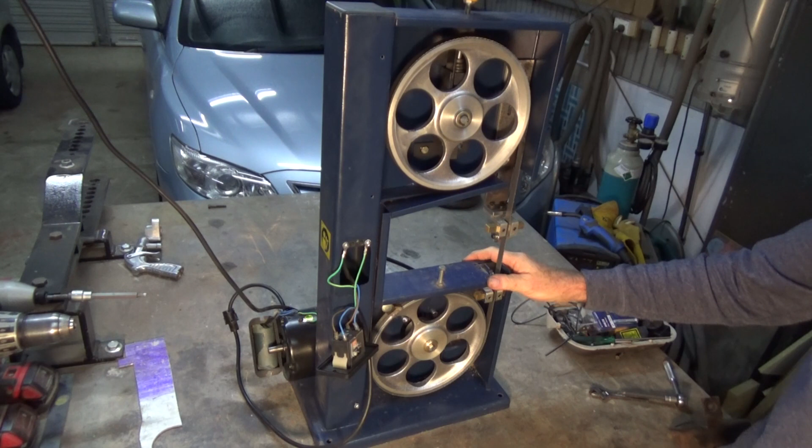In the last episode I left you with the bottom wheel being rotated by the motor, and we had a look at the gearbox assembly and how that was mounted to the back of the saw. We had the top wheel fitted, but at that stage I hadn't shown you the bandsaw tensioned up on the wheels and actually rotating.

Also in the last episode I was using an inappropriate gearbox. I had a 60:1 reduction. What I really wanted was a 30:1, and I've got that now, and I've mounted the wheel permanently onto its shaft. There's a big brass washer there and a draw bolt which keeps the wheel mounted on its keyway and mounted to the extension on the gearbox spindle.

As you can see, I've got the blade fitted, it's tensioned up. I've got the blade guides fitted now. There's still a lot of work to do on those, but it's sort of at the point where I think it's going to go forward. I'm going to run this down and show you what it looks like with the blade tensioned and running on the wheels, and you can judge for yourself whether we're getting anywhere with this project.

So here we go. Electrically safe, as you can see.

Now the first thing you might notice is it's way quieter than when I showed you in the last video. That's because I did a lot of work on the coupling between this extension shaft and the gearbox, and also the motor mounting, which we'll look at shortly.

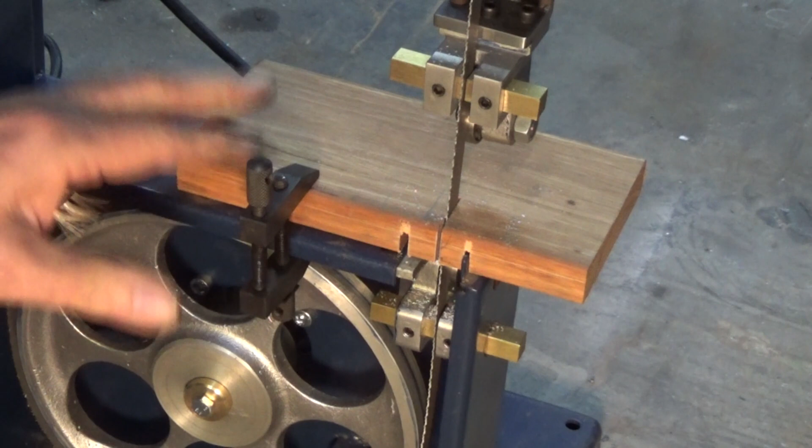Okay, you'll have to forgive this temporary sort of table I've got on here. This bracket still has to be attached to the back of the saw, and the table fits on top of that, and I just haven't got to that stage yet. So I've just got a piece of hardwood clamped down to the top of the frame here, and this would be enough to give you a demonstration.

So this is 3mm thick aluminium. We'll just see how that goes.

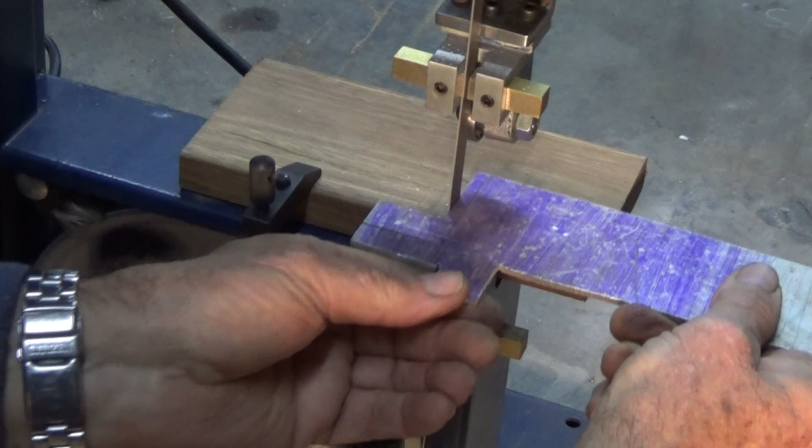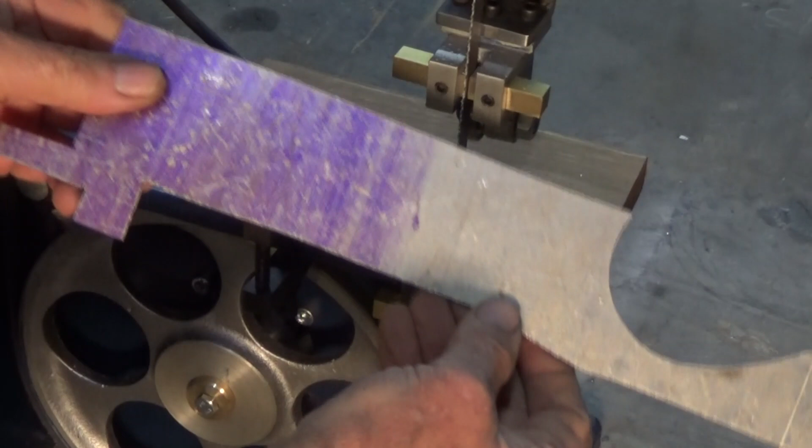So, I'm not sure what the cutting speed there is, but that's as good as I want this to be. This is pretty much what I want it for. It's just for cutting up this sort of stock quickly and simply without having to break out things like a jigsaw and clamps and straight edges and all that sort of stuff. So that's aluminium. I'm happy with that.

Let's try a piece of steel. This is roughly the same thickness in a galvanized steel.

Okay, a bit slower, but it's controllable. I can see what I'm doing. I can guide that cut along a line very easily. I can cut into a drilled hole if I want to take out sort of a U-shaped section out of a piece of stock. I can take a strip off an edge. You know, it's pretty much what I expected this to do.

Now, just trust me on this, it's early days. I've got a lot of work to do yet with this blade guide system to make sure that that's supporting the blade properly. I don't have the blade tensioned up fully at this stage because of the problem I have at the bottom here. But as a proof of concept, I'm feeling like this is going to be as good as I want it to be.

Okay, so let's have a look at how I got to the point where we got these blade guides fitted. I'll show you the manufacturing process for that. And then we're going to look at the motor issue.

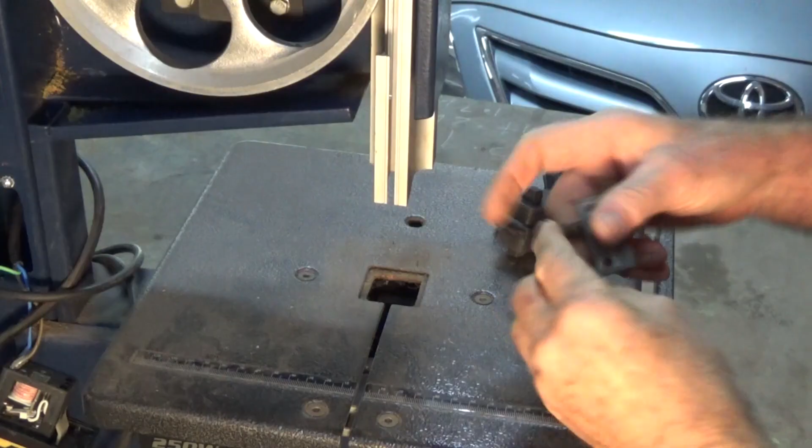This is the only bit left of the blade guide assembly. The one below the table is completely missing. This one just came like that and had a ball bearing mounted on here, and I'm guessing it was designed to fit underneath this aluminium extrusion.

The ball bearing was to take the back thrust from the blade, but there was no evidence of any side-to-side support for the blade, so I'm not sure how that was meant to work. So what I've done is made up some patterns for some new castings. This is the one for the top blade guide assembly. There'll be a ball bearing fitted on here, and these core prints are for a square hole that'll go right through the casting later on.

We're going to fit some brass square side supports that will be adjustable and can be locked in place with a grub screw from the front. I decided to go that way because it's simple, it's robust. I had a saw with that system on it and it seemed to work quite well. So that one will go there.

The bottom one will be screwed in from... how does that work? Yeah, that's going to be screwed in from the rear to the back of the saw frame. So what we need to do is get those castings made, get them machined, and fit them.

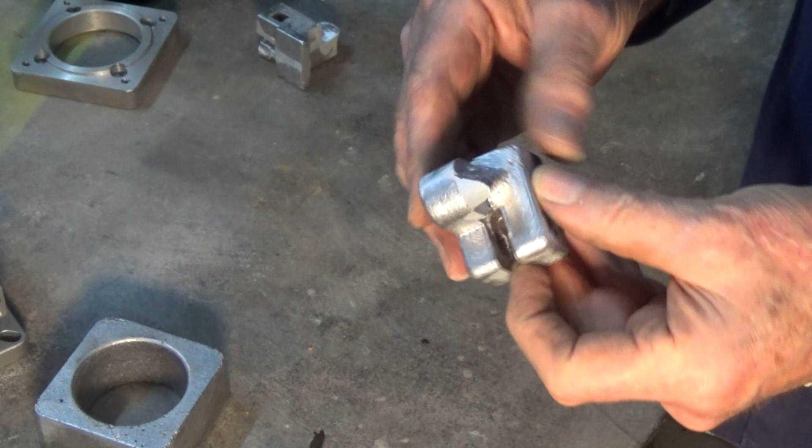Okay, situation report. This casting here turned out good. The core has done its job. It's made the square hole through the casting where the brass blade guides will go, and the other gap here is where the blade will pass through the blade guide on its way down to the bottom of the table. So that's all good.

And this bit here, well, rookie mistake really. I put the runner in the drag side of the mould without referring to the cope side or the top side, and this projection or overhang was there. So the runner ended up being in the way. But it doesn't matter because this is all going to be machined away.

I've got to put an accurate machined surface on this projection here for the bearing. The bearing itself is going to go sort of like that - I'll show you on the other one. So here on the other one you can see the bearing is going to sit on that space there, and it'll be mounted on an eccentric so it can be rotated around to take up the gap between the blade and the bearing outer surface.

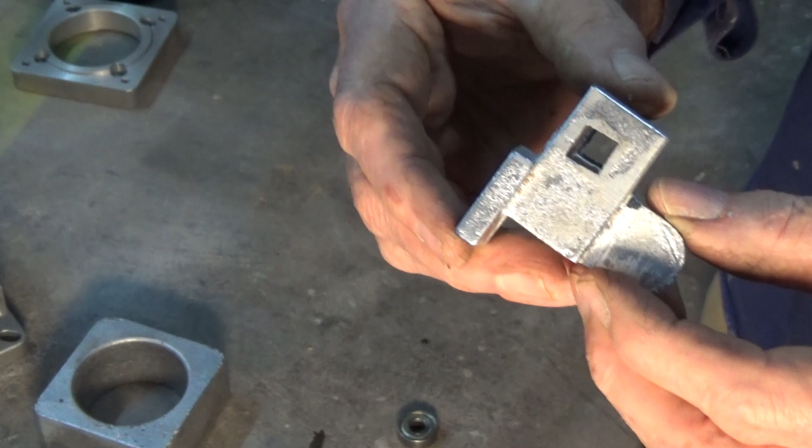Now this one, well, you judge for yourself. It looks like the core got displaced sideways when I closed the mould. That side there you'd say, well, that's okay, that's acceptable. This side here is a bit more ugly, and disappointing, but I think I can make it work.

So I'm going to go ahead and machine this anyway. Okay, this one turned out great, and obviously that's a much easier casting to do, and I'll go ahead and get that machined as well.

Now, I knew that this was going to be problematic, and I just wanted to set myself a bit of a challenge really, to see if it could be done. In hindsight, I sort of knew it was prone to failure because you've got to close the mould on that core, and there's every chance it's going to move a little bit or smash away part of the top of the mould.

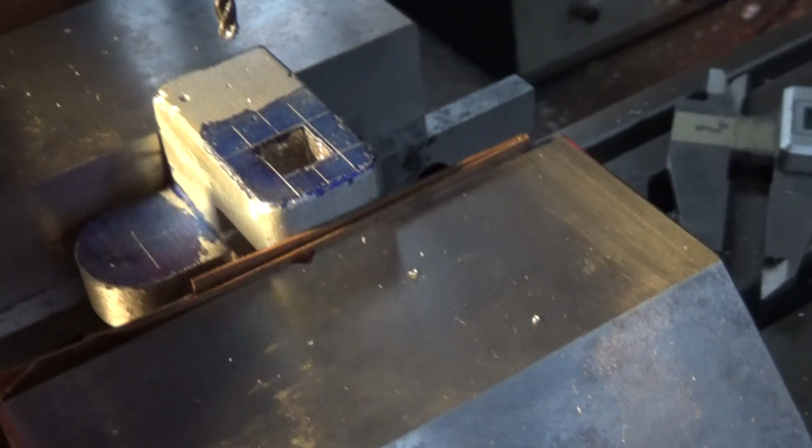This is my casting for the lower blade guide on the bandsaw. This square hole was actually cast in using a core, and it came out pretty close to size. You can see I've scribed in the correct position of the edges of that square hole. This is the brass stock that I'm going to be using as my blade guides.

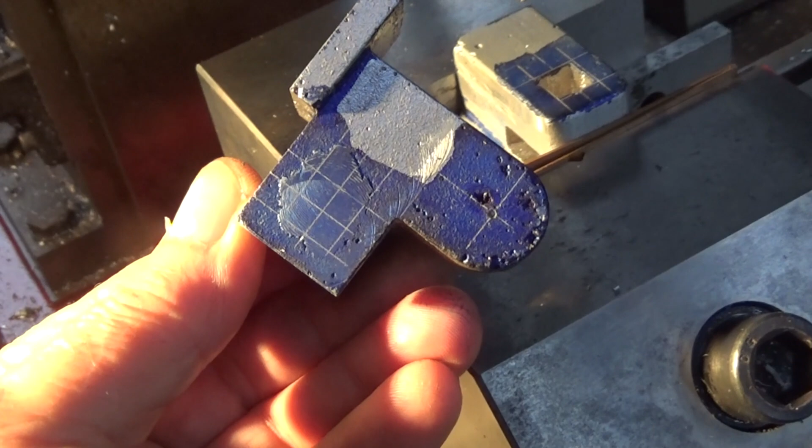So on this one I'm going to machine a pocketing operation just to bring that square hole to an accurate shape. It's probably going to be a little bit undersized, and I'll need to carefully file that to finish up. The other blade guide was also cast, but I didn't bother casting in the square hole, and I've already partially machined this and marked it out. This one I'm going to have to cut that square pocket right from scratch, taking out all that material.

Yeah, I'm using a 4-flute end mill, 3mm diameter. So I'll go ahead and get this one cut, and then I can file that to its finished shape. It's going to have rounded corners in here which will need to be cleaned out.

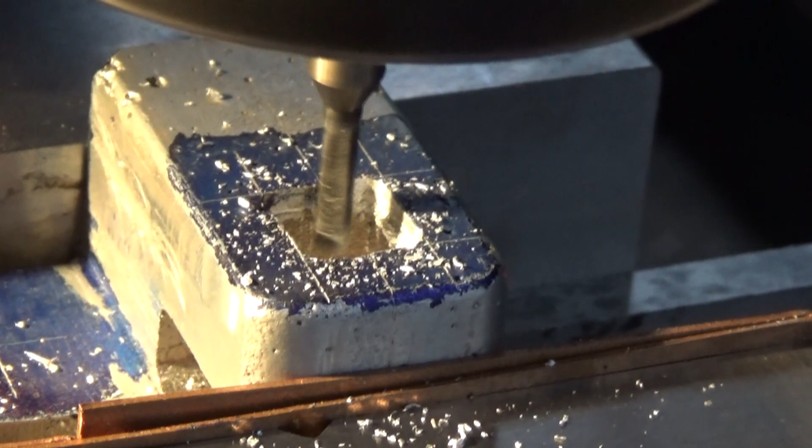There's that square brass stock now fitted to those holes, so I had to do a lot of work with needle files just to get the corners sharp, or actually undercut slightly so that brass stock will fit through there. I'm guessing this stock doesn't need to be square, it could be round and would probably still do the job. So there'll be a pair of drilled and tapped holes here, and they'll hold a grub screw just to lock these brass pieces in place.

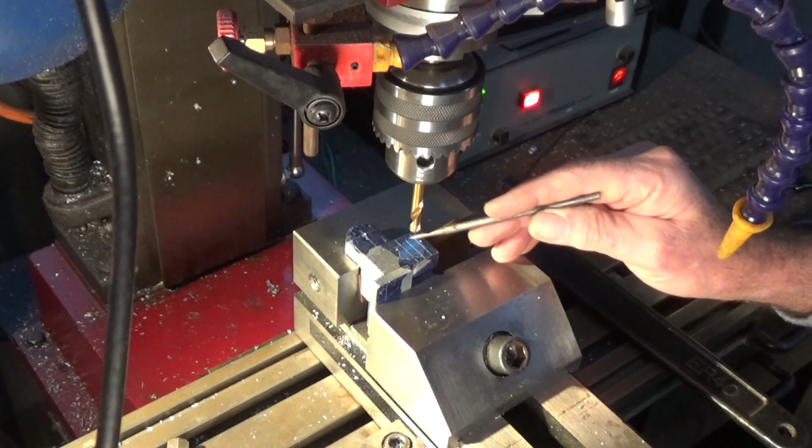Okay, so now I need to get the other one done. This will be the one that's going to have the full pocketing operation, not just cleaning up the edges. This is the upper blade guide, and I need to get rid of all the stock inside that marked out square there. So I'm going to drill it, because guess what? Drilling is still the most efficient way of removing metal, or one of the most efficient ways.

I'll swap over to a 9.5mm drill and drill out most of that material, and then we'll just run the end mill around the edge of the square. Okay, I know that wasn't terribly efficient. I was running that as a pocketing operation, even though I drilled away most of the material, but that's okay.

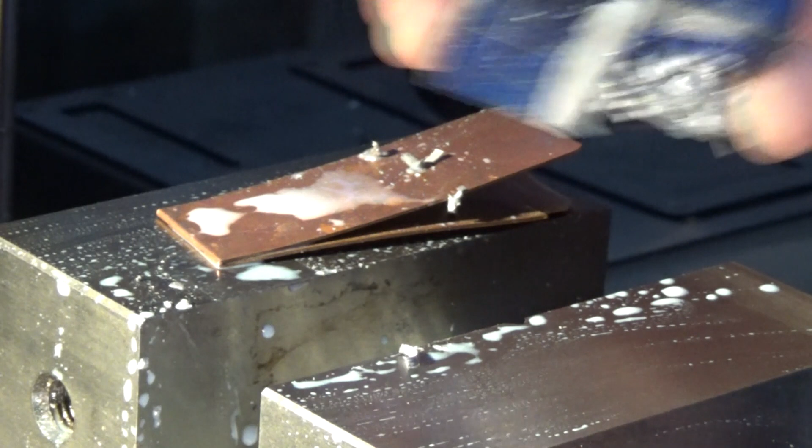This is where I'm going to drill through 9.9 and ream to 10mm. That's going to support this eccentric, which is where the bearing will fit, and this gives me some adjustment on the back of the blade. So I'll get this all drilled and reamed, and these things are nearly finished.

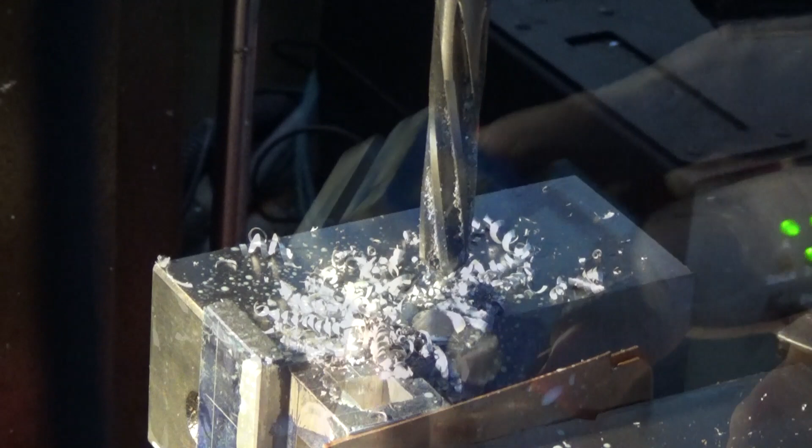Okay, well, that's most of the upper bandsaw guide done. I'll need to drill and tap some holes with set screws to hold the brass square stock in place, and I need to drill and tap here to attach this to the guide arm on the top of the bandsaw.

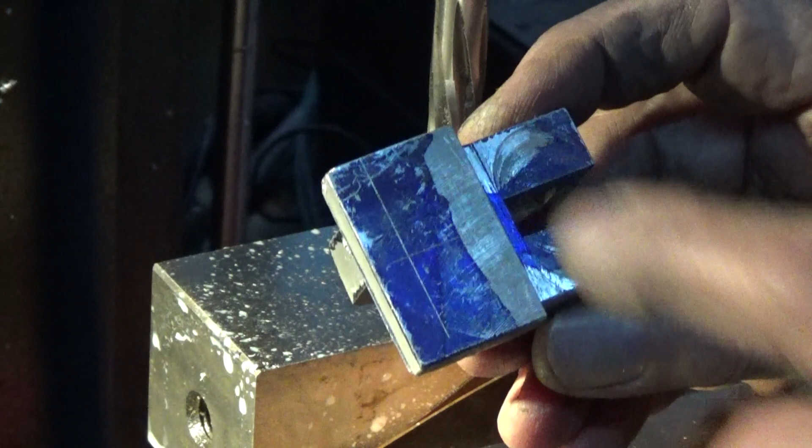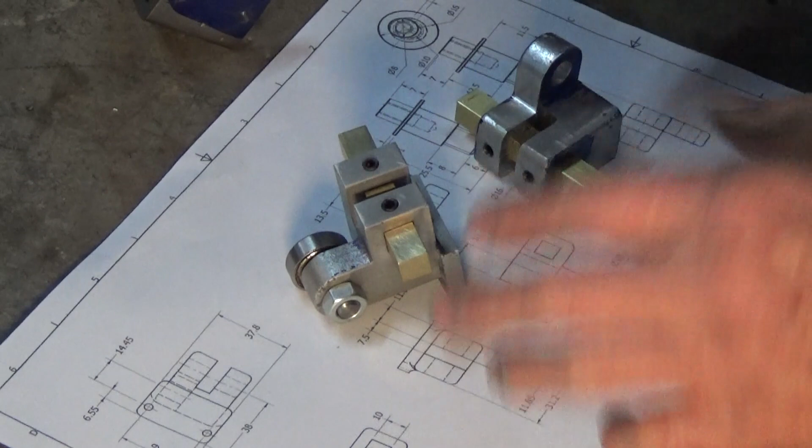Okay, it's time for an update, and I've been doing a lot of work on these blade guides, because until I get those done we really can't test this saw out in a serious way. And what I tend to do with this is I model the parts in my 3D drawing package, which is Autodesk Inventor, but you can use whatever you've got. And these drawings are just a guide. I update these as I work on the prototypes. And remember that this whole machine is a prototype.

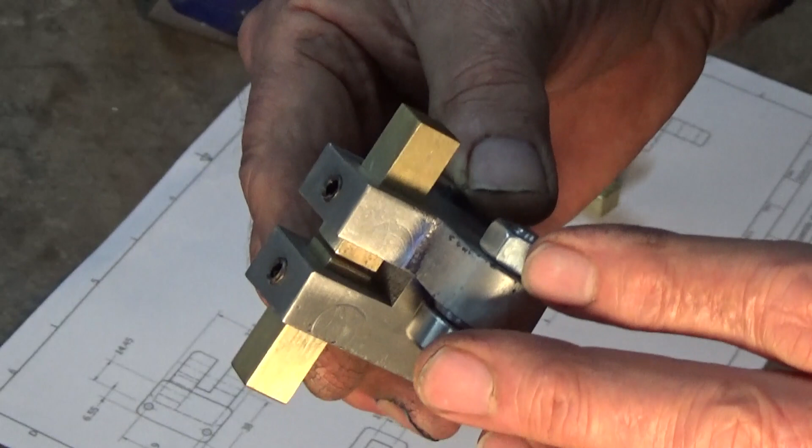There are going to be changes that need to be made along the way, and we'll look at those in a minute. This is one of the guides that I've got that's almost finished. So this has been machined on the CNC mill and my manual mill. Remember, these were rough castings when we started, and you can see the brass guide box now in place. And why did I use brass? I don't know, it's cheap, low tech. I've seen some with bearings rubbing on the edge of the blade, but it just seemed like a lot of work for no reason really.

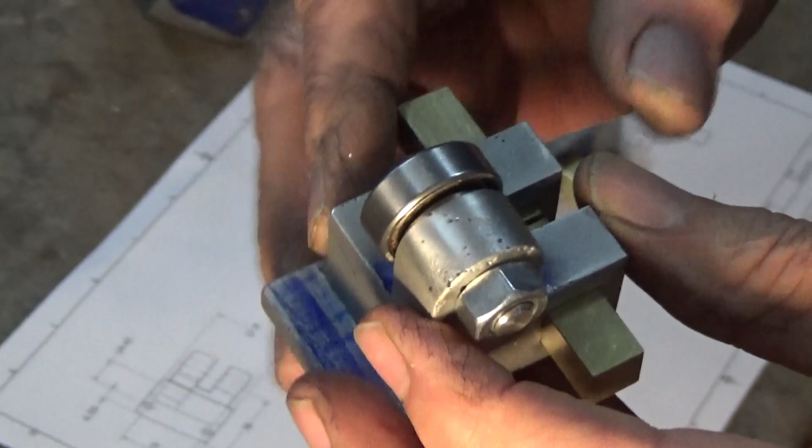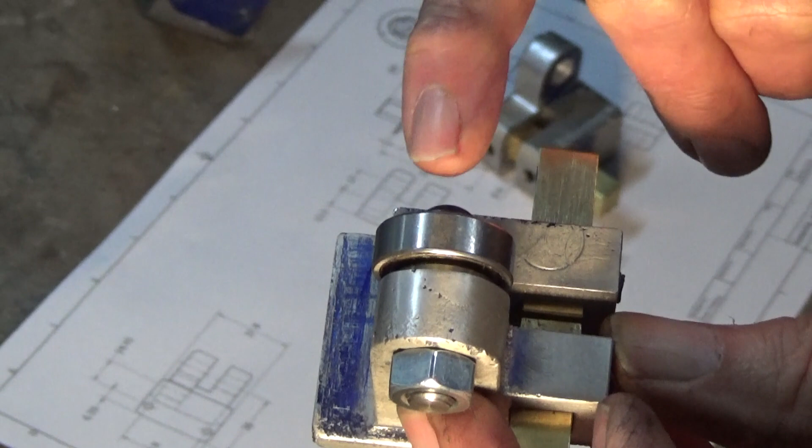The back thrust on the blade is taken care of by this one bearing here, and it's mounted on an eccentric shaft so that we can rotate that, and I can get 3mm of movement between the back of the blade and the face of the bearing. So we're going to look at how I've done that in the lathe in a minute.

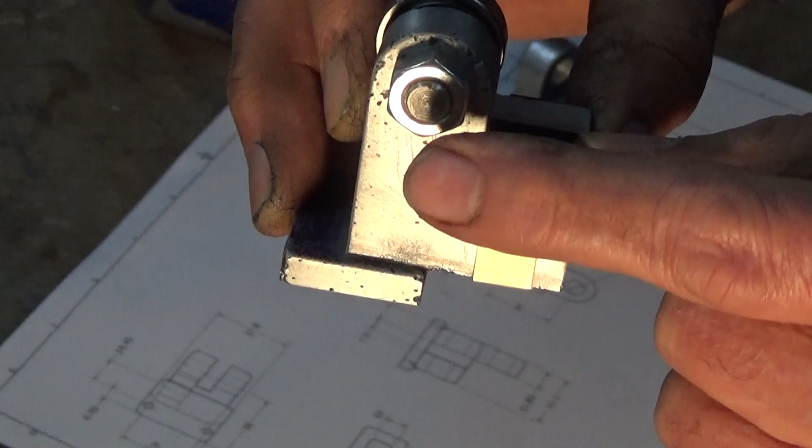Now this is the upper blade guide. I can put a screwdriver slot in the end of that 8mm threaded section there, and I can rotate that and then tighten up the M8 hex nut. Now I can't do that on the lower blade guide. It needs to have like a hex extension on there, so I can turn that with a spanner. I just can't get a screwdriver in there. But so far these are looking pretty good.

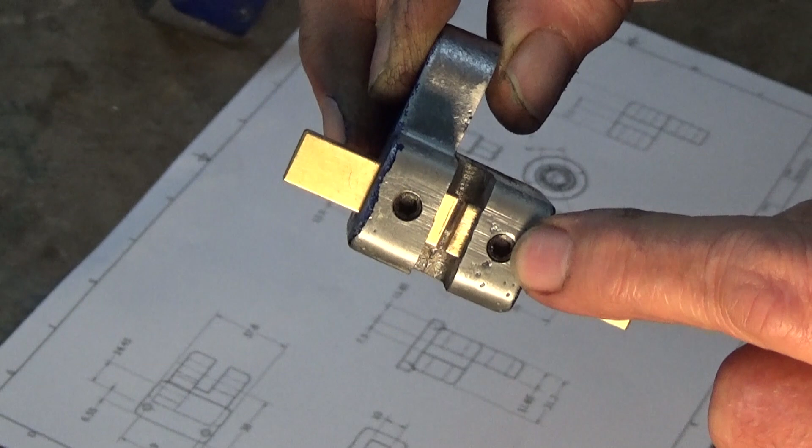So this is the lower guide here, and I've got the same brass blocks sitting in there at the moment. They're locked down with a pair of grub screws, socket head grub screws, and you can see the face where the bearing will be going and this has been machined. So let's head over to the lathe. We'll have a look at how we're going to do this.

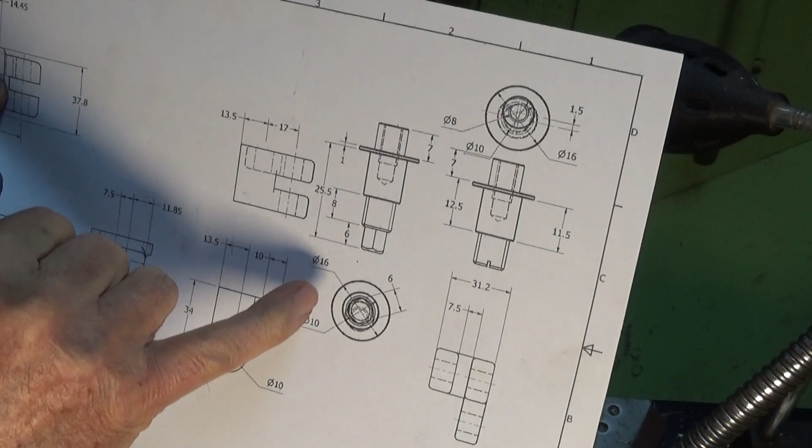Okay, this is the part that I'm making at the moment here now. This is a bearing spindle, if you like to call it that, and I've already machined all of these features on this end, and all I need to do now is cut this journal for the bearing.

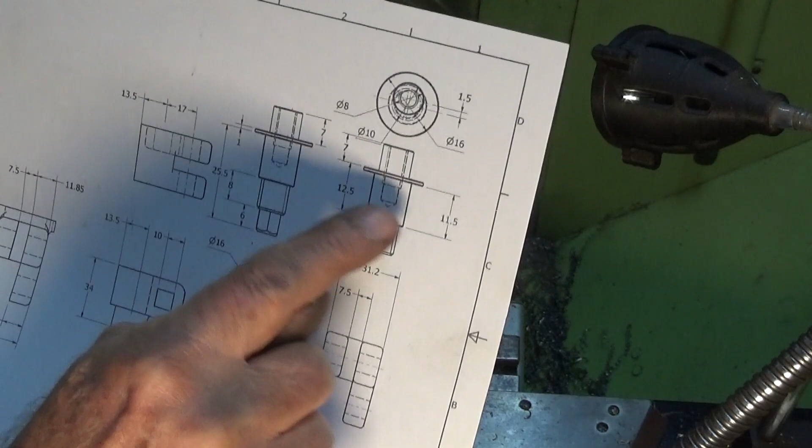And on this other one, I haven't dimensioned on this one here, but on this one here you can see there's a 1.5mm offset for the journal that carries the bearing, so that when you rotate this whole spindle you get a total of 3mm of movement with the bearing to bring it up against the back of the blade. So here's the part.

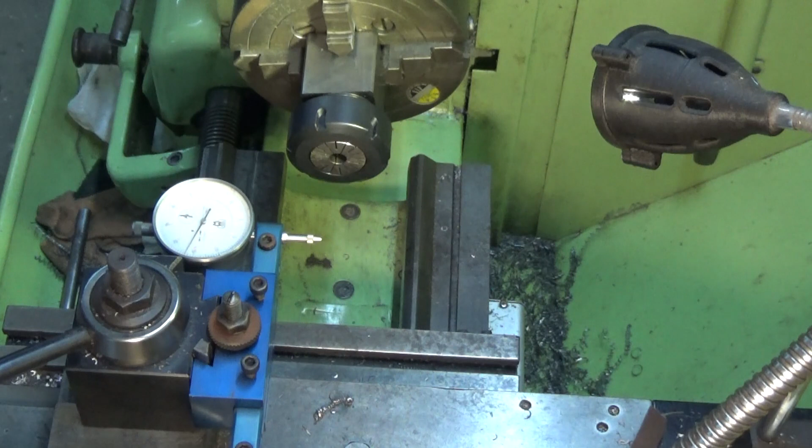So as you can see there, I've machined everything, including the little hex on the back there. There's an M8 thread, and this is the 10mm surface that fits through the aluminium casting. So what I need to do now is machine that little eccentric on this end. Now this is the setup I'm going to be using for this.

So what we can do is put the partly finished job into the collet block. Now if you've got one of these square collet blocks, it makes this whole job really simple. And it's just necessary to lock your part in there. And what I would normally do then is to set that to run true. So I just move my 4-jaw chuck, get it centered, and then we can put the indicator against that surface there.

And as we turn that, we can read the total eccentricity. So let me just get this set up correctly. Now I was going to set the dial to 0, and then we're going to sweep this around half a turn, and we'll check the total amount of run out. So that's 1mm, that's 2, and coming up to 3.

So I've already done this, but you can imagine that you just have to move the jaws backwards and forwards in one plane until you get your total eccentricity of 3mm. The only thing that gave me grief when I started this process was I forgot that when you move the jaws, you only move half the total amount of error. So if your dial is indicating 3.6, when you move the job you only move 0.3, and you can very quickly get your job in the position it needs to be.

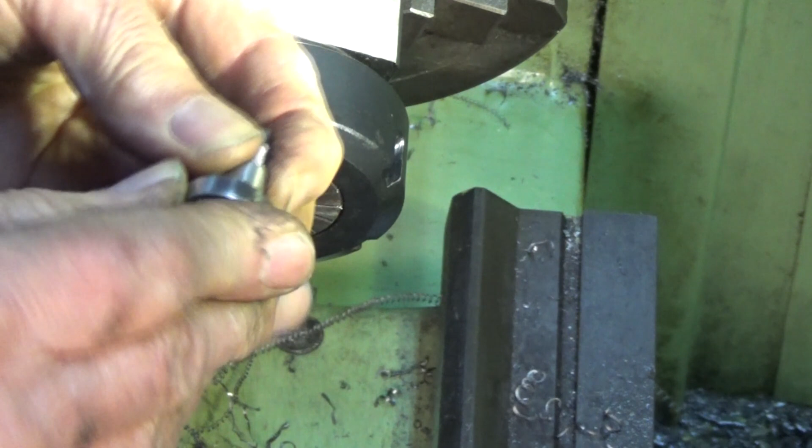Alright, so that one's done. Bearing will go on, and we'll put a socket head cap screw in there with a washer just to pull that bearing on there. And that gives me the eccentricity to adjust up the gap between the back of the blade and the bearing.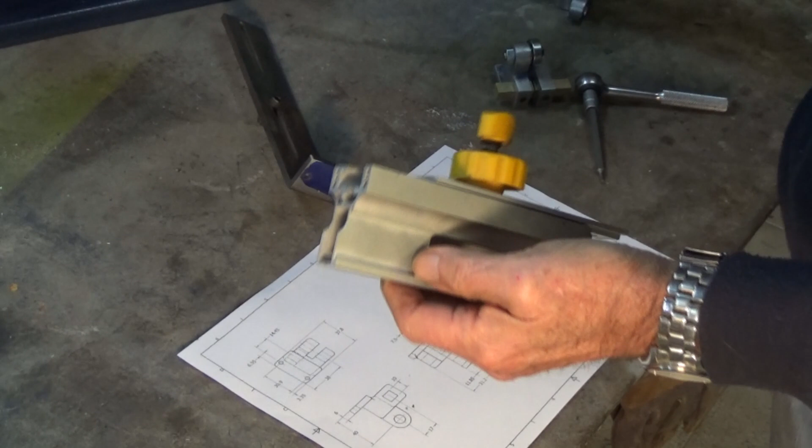Nearly done. This is the blade guide that came with this GMC saw, and when I first saw it I thought, oh, it's a neat little solution. It's got a sort of a rack and pinion adjustment so you can lower the blade guide. Now the blade guide that came with the machine was that little die casting there, and it had a bearing on it. I'm still not sure how they took care of the side thrust on the blade, but when I had a look, the attachment points were just a pair of very small holes, and there were a couple of self-tapping screws to hold that plate in place.

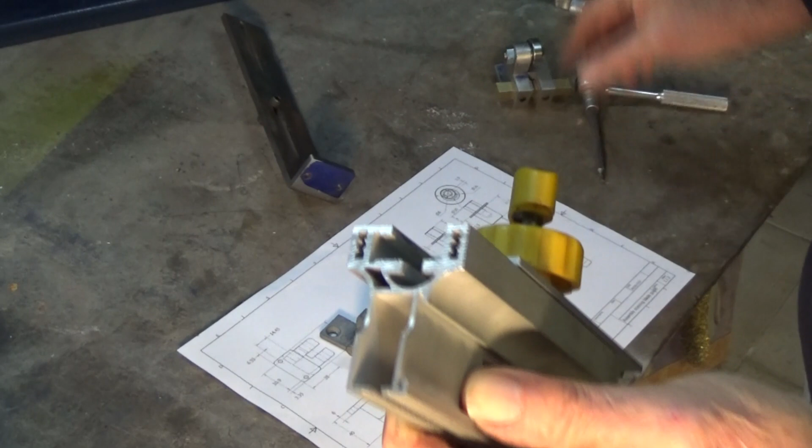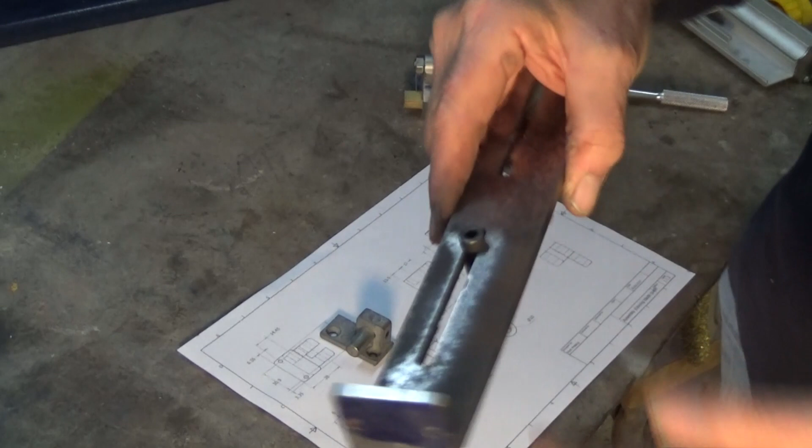And with my sort of a man's blade guide, it didn't seem right to attach that big chunky casting to this extrusion here with a couple of self-tapping screws. So in the end that got the flick, and what I've done is I've made up this bracket. Now don't judge me on the finish, it's still got a long way to go yet.

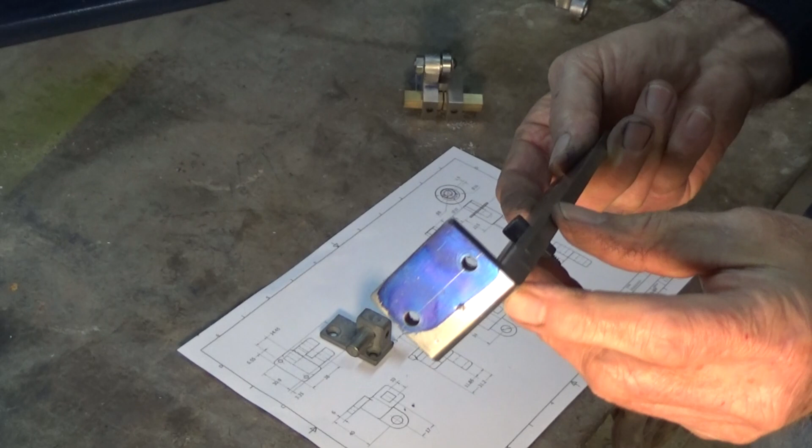So this just started out as a piece of hot rolled steel, and I have cut and welded a 90-degree angle on the end of that, and that's been drilled to take a pair of M6 screws, and they're going to be threaded into the blade guide like that. So that was going to slide up and down inside the chassis on these slots, and I'm going to lock that in place with a couple of those little ratchet handles. So there's the assembly for the upper blade guide.

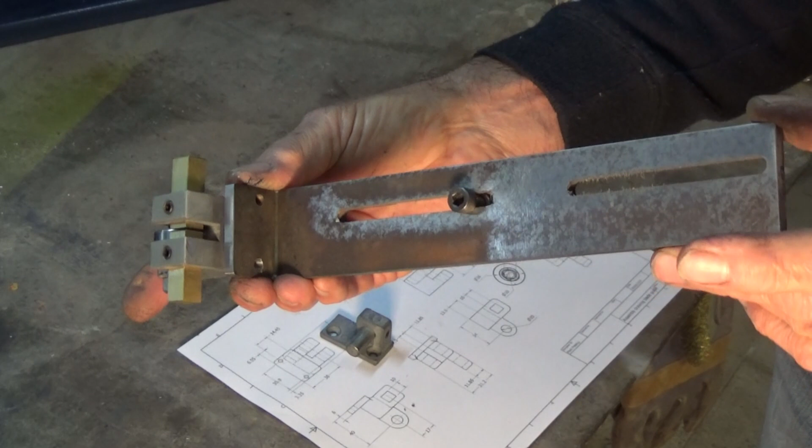Getting close to having that fitted now. This will eventually be sandblasted because I've got a sandblaster now. So get all that cleaned up, and I might even zinc plate this just to make it look pretty.

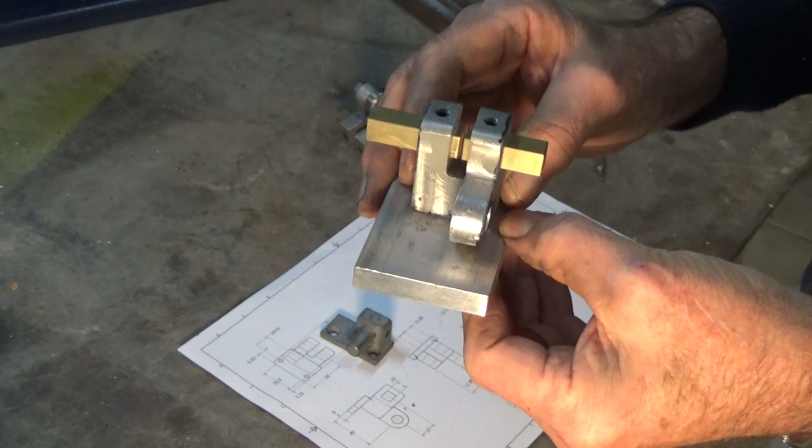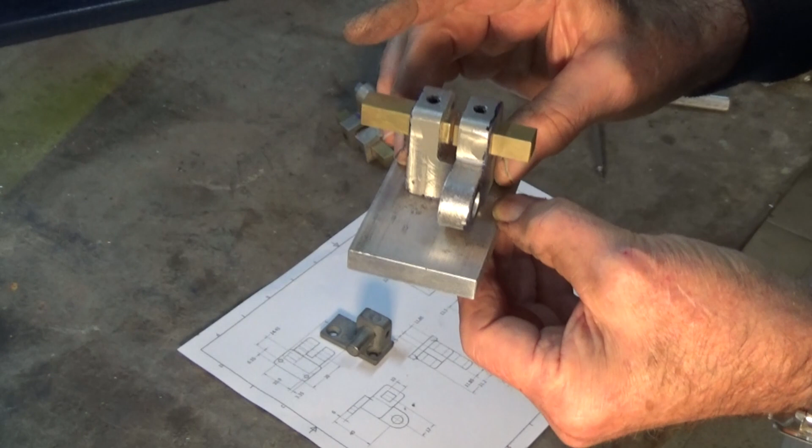The lower blade guide doesn't need that vertical adjustment, so it's going to be just screwed to a piece of this 10mm thick aluminium plate, and that sort of puts it in the correct relationship to the blade. And this doesn't need to have any of that vertical adjustment, but I'll probably put a slotted hole which will allow me to actually move this left to right to align it accurately with the blade. Doesn't need a lot of movement, just a tiny bit will do, and that will be fixed permanently in place underneath the table.

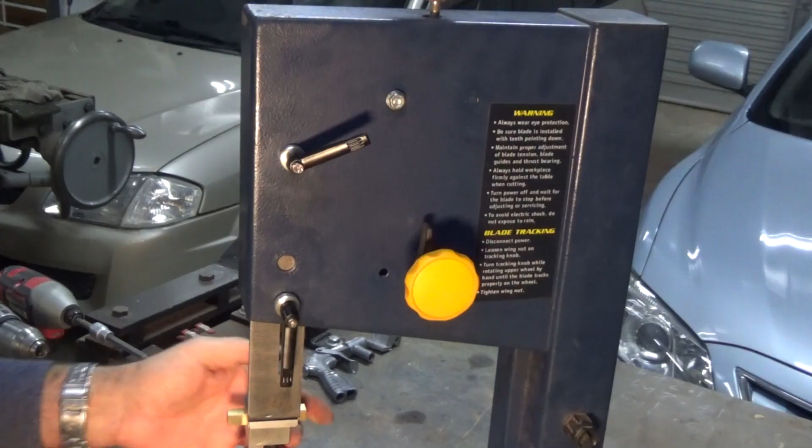Now the upper blade guide is adjustable. You can see that I can move that up, loosen it off properly. I can move it over that range, and it's held in place by two M6 screws running in a slot. So here is that whole assembly from the back, and you can see here that I've got a pair of these little ratchet handles with a big aluminium washer on the outside, and these are good because you can reposition the handles so they're not clashing with each other, and they give a really positive locking for that blade guide assembly.

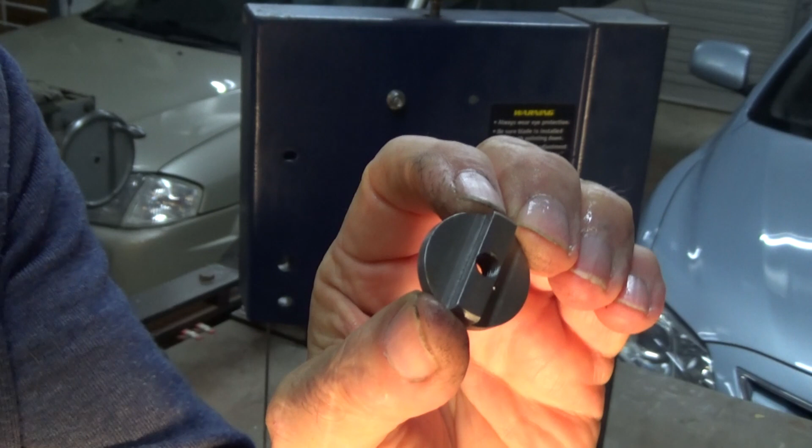Where these ratchet handles fit through in the frame of the saw, there were two existing holes there which were part of the original blade guide assembly. So I didn't drill those, I just made use of the ones that were already there. You can see the slots and the way that that ratchet handle slides up and down. Here is one of the T-nuts. So these were just turned and threaded on the lathe, and then I milled away the sides to create that extension. So that just fits through that 6mm wide slot and is able to travel up and down and clamps everything in place quite nicely. So that bit I'm very happy with.

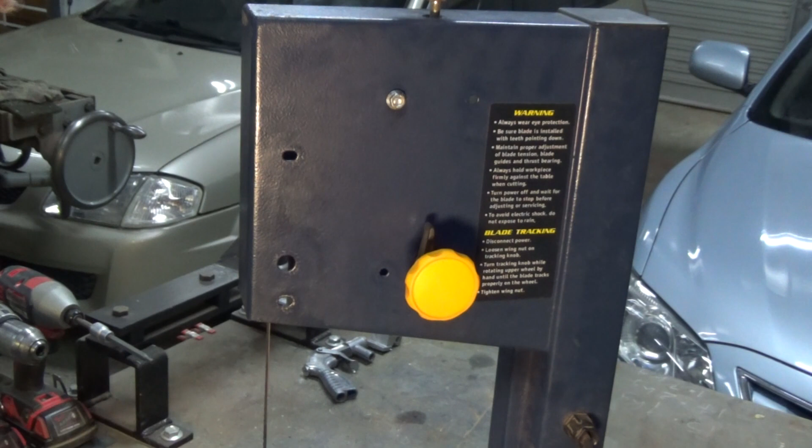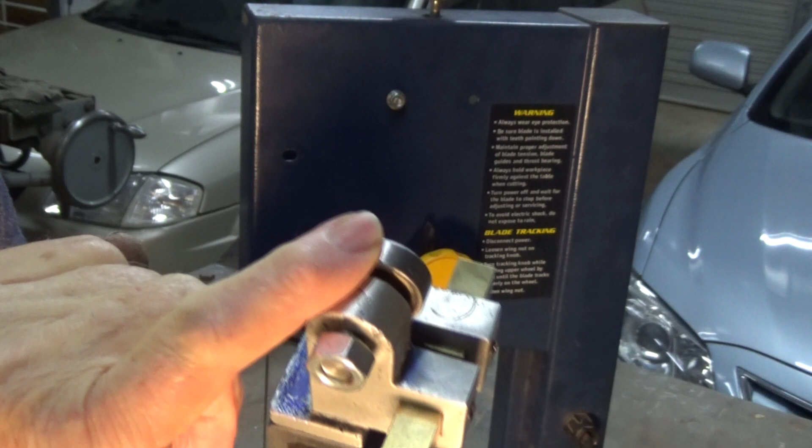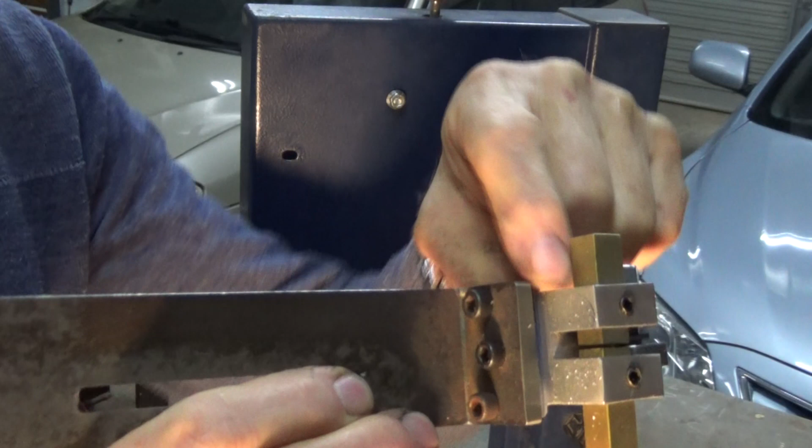There's the business end of the blade guide now pretty much finished. I do need to do a little bit of work with the positioning of this ball bearing. It's not coming far enough forward. I'm not quite sure how I'm going to tackle that yet. It probably needs slotting these holes here so that I can move it backwards and forwards and get some more adjustment.

Right, here is the lower blade guide assembly, and it's sort of just sitting there at the moment. This is the part that I'm least happy about, and that was the requirement to have some adjustment on that brass scrubbing block. And it meant drilling a large hole in the side of the frame and protruding that from the frame. Not ideal, but there's very little room to work with here. When the wheel is in place, you sort of just get that quadrant there to fit all of that assembly. So I did the best I could with the amount of space that I had.

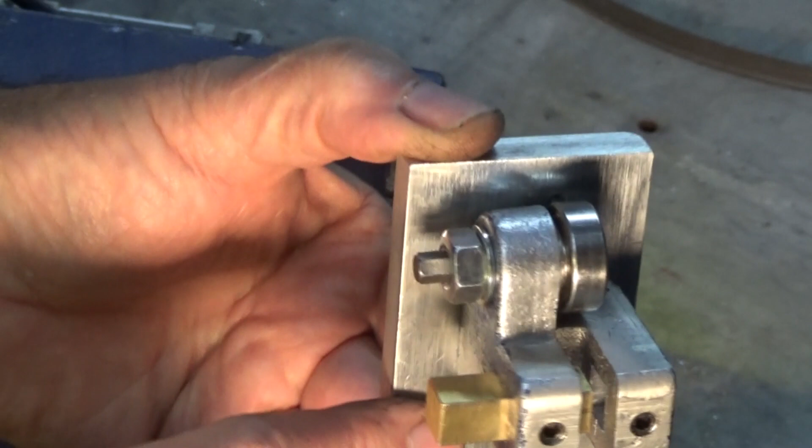If we take that blade guide assembly out, you can see how that's been mounted. So what we've got is a piece of 10mm thick aluminium plate. The edge has been rounded over here so that matches the welded seam on the inside of the frame. There's a pair of countersunk socket head screws there, which attach the blade guide casting to that plate. And unfortunately I don't get any adjustment with this. I can't move it up or down or side to side. I can move the bearing front to back, but I sort of run out of adjustment on that, and I still need to do some work on that to get that fitting tight against the back of the blade like I hoped I would.

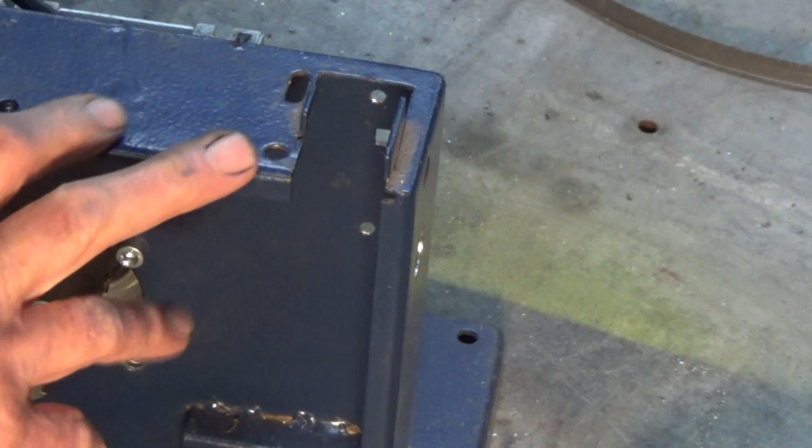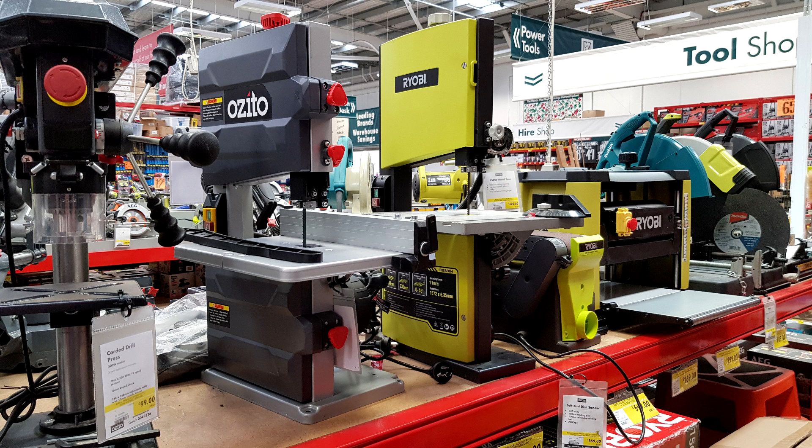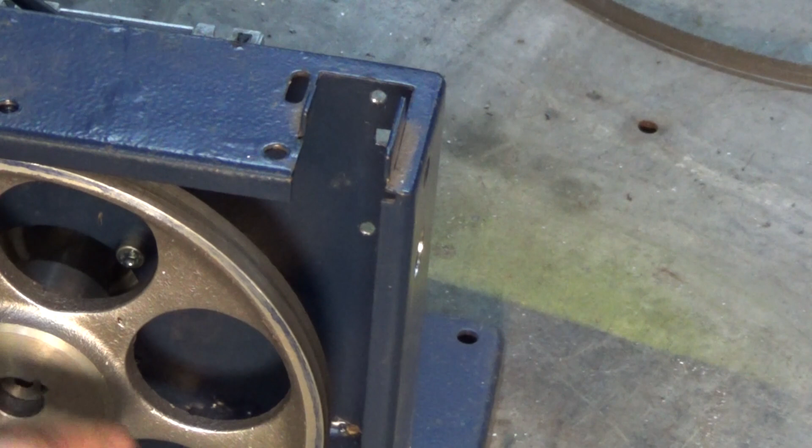Now, interestingly, I went to my local hardware store the other day and I found two saws very similar in size to this one. One was a Ryobi, the other one was an Ozito, and both are cheap Chinese bandsaws with roughly the same form factor and same dimensions. They both have similar wheels to what I've got here, and the blade guide assembly on both of them was, well, admittedly it was only for wood, but I thought it was a pretty cheap rendition of a blade guide. Here's a picture of it close up.

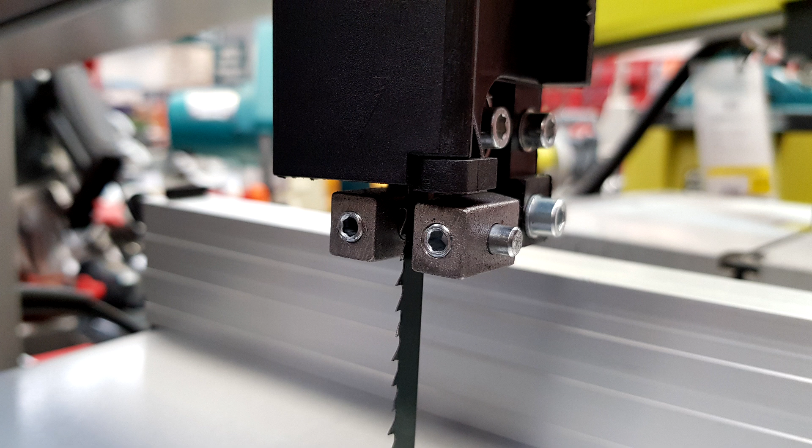Both of them retail for around about $120 to $140 Australian. Both had exactly the same motor that I've got on this machine here, and interesting that you could probably buy one of those saws for $140, but they're so cheap, I imagine that there would be plenty of them lying around as scrap. So if you were able to find one, and because it has the identical motor and probably a very similar sort of frame, you could probably do a similar thing to what I'm doing here.

Okay, this is our motor. It's a 250 watt induction motor. It's got a capacitor, and I believe this type of motor is called a capacitor start, capacitor run. There's no centrifugal switch on the shaft, so the capacitor is energized the whole time the motor is running.

Now, stupid me, I fitted all of this up and switched the saw on, and I was a bit surprised and embarrassed to see that the drive wheel was running in reverse. I hadn't considered that I've got a single stage gearbox, so it became obvious to me that that was going to reverse the shaft direction. So I thought, well, no problem, I'll just reverse the motor electrically. And when I had a look at it, I realised that there are only 2 wires and an earth coming out of the casing of the motor.

I had a look at Matthias Wandel's website, and he's got an excellent tutorial there on induction motors and how to reverse them. According to what I read, this is a very cheap form of motor, and what they do is they couple the start and run windings together inside the coils of the motor so that you can't get at them to reverse them. I didn't mess around with the capacitor, I just left all of that. As you can see, it's still got the original connections on it.

And what I did in the end was I just simply took the armature out and I flipped it. Now, you can do this because both of these end shells are exactly the same. They have the same size bearings, they're the same length, same diameter, and there's plenty of clearance at both ends. So I dismantled the motor, took these shells off, and I turned the armature around, and then I bolted it back onto the gearbox.

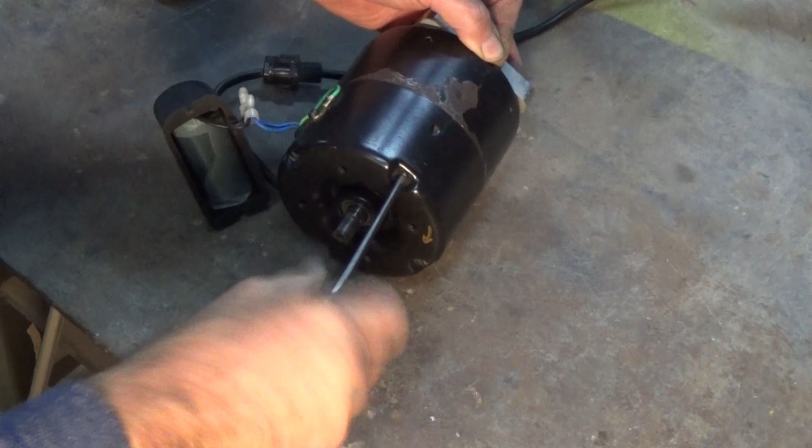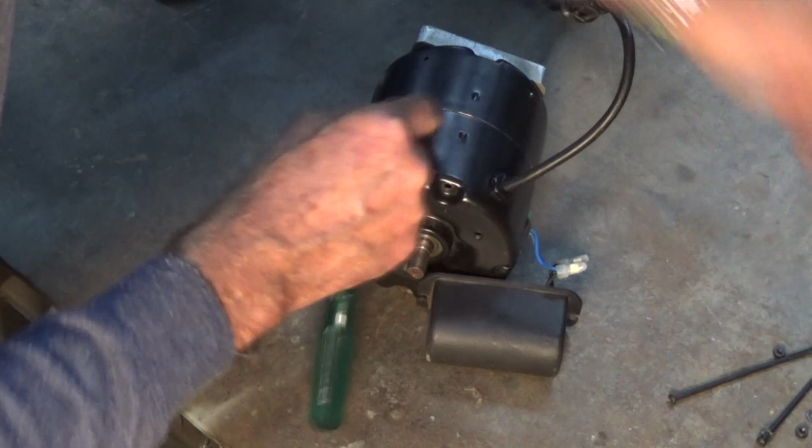Just thought I'd show you what I meant when I said that you can dismantle this motor and reverse the shaft. So the whole thing is held together with just 4 of these long screws. Now, I've had this motor apart a number of times, so I've only got 2 of the screws in here at the moment. So all I do to get this apart is just tap the shaft gently.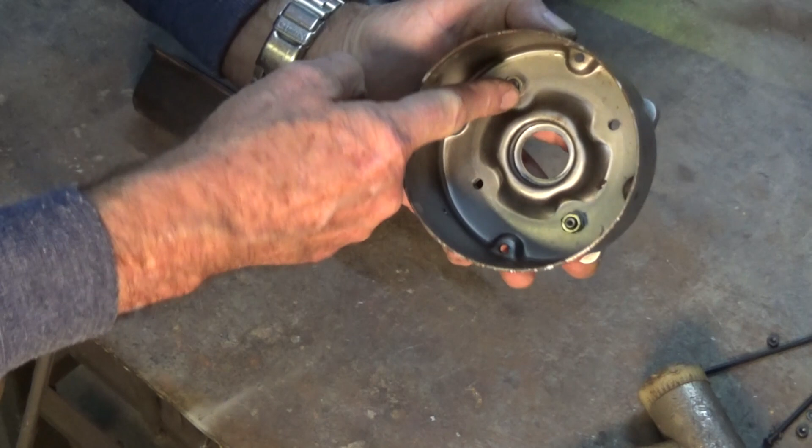Okay, so there's the forward end, and you can see inside here I put 2 M6 bolts and nuts to hold that casting onto the front of the motor. The armature just comes out like that, and it's got 2 wave washers at the front end to take up the thrust on the bearing.

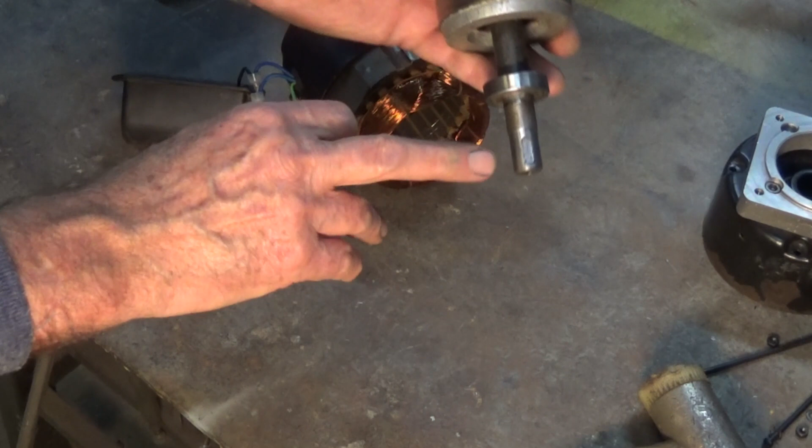Now, I did have to machine this end of the shaft to make it fit the gearbox. Turns out it was about 14.5 millimeters, 14.7 or something like that. I just kept machining that down and trying it in the gearbox till I got a good fit. I did have to machine that keyway, but the whole assembly is pretty straightforward. It's pretty basic.

Now, like I said, if you're brave, you can cut these connections and take this end shell off, and you can flip it around. That way, the 4 holes that connect to the gearbox are already there. Now, it's up to you how you do that. I did this on the CNC mill. So I was able to take a position off the bearing housing and then set out my 4 drill positions to do it that way. You would have to be fairly accurate if you were doing that.

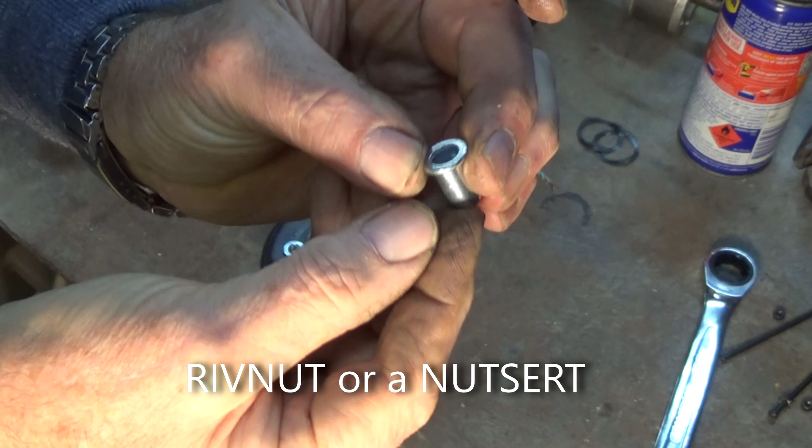Now I'm not really happy about having these nuts on the inside of this motor. If they ever came loose, they're going to rattle around inside the motor and do some bad things. So I'm going to fit a thing called a rivnut in there, and that's going to allow me to tighten up these socket head screws from the outside without needing to get to the inside of the motor.

Okay, this is a rivnut, or sometimes called a nutsert, and this one is steel. It's M6. The outside diameter of that is 8.9 millimeters, and what I've done is I've drilled out the end plate of the motor at 8.9. I've already put 3 of these rivnuts in place here. On the inside I've already formed one, and you see here that there's a ridge of metal that's been expanded and pulled up tight on the inside of that motor casing, much like a pop rivet. These other 2 have not yet been formed. Alright, and I'll show you how that works.

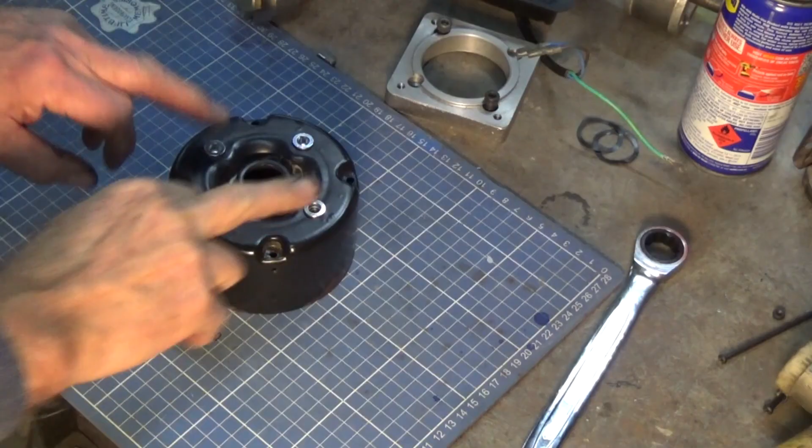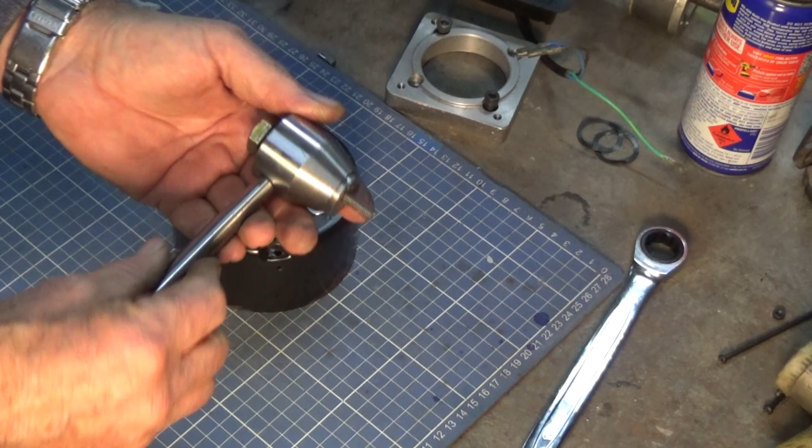So with the rivnuts in there now, the way that you form these is basically to pull up on the end of the rivnut using some sort of a tool, which can be hydraulic, can be screw operated, lever operated. There's all sorts of different techniques out there. This is a tool that I made myself, and I'll put a card up if you want to go back and look and see how that works.

It's very, very simple. It's just a 12mm high tensile bolt. It's been turned down at this end and threaded M6, and I've got a series of these for all different size rivnuts, so starting at 3mm going up to 6, but you can get bigger ones. And inside the tool there's a thrust washer, and if you're careful with the dimensions, you can get this so that it will pull these rivnuts up quite effectively.

And let's have a look at doing this one here. Yeah, that one's not done. So all you need to do is to thread that M6 extension into the rivnut. Right, now you get to a point where you feel some resistance. Which is there. Now at this stage, you can see it's all a bit floppy and it wants to move around. Just keep pressing down and keep tightening that until it starts to deform the inside of the rivnut.

So if I turn that over, I'm not sure if you can see, but there's a bulge starting to form against that inside surface there. So we'll go a bit further. Basically keep going until it feels like it's stopped and it's not going any further. Now you can see that bulge quite clearly. And if I go any further now, I'm going to strip that, so I'll just stop and back it off.

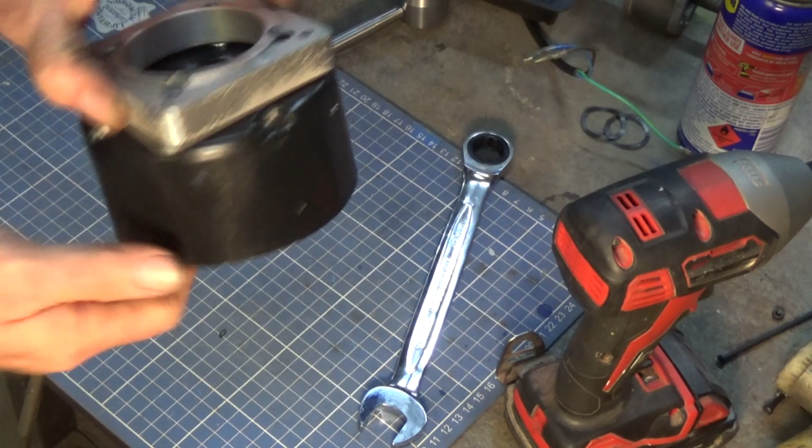Alright, so that's 3 of them done. Got 1 to go. There's the casting bolted back on again. There's the riv nuts on the inside doing their job. But it does mean now that I can disassemble this without pulling the motor to pieces. So that's the only thing you need to worry about if you are going to use this original motor, and in my view you should.

It's the right size, it's compact, doesn't consume too much power. It has enough horsepower to cut metal. That's not a problem because of our gear reduction. So in my view, I'm happy with this motor as it is. I like the way it all fits. It keeps the center of gravity low. If you're moving the saw around and carrying it from one place to another, which I have to do, that's good. It makes it easy to transport.

So that's where we're at this stage. I'm going to wind this video up here now. In the next video, we're going to look at the finishing, that is making everything look pretty, putting it together. There are a few little extra tweaks that I want to do on this, and I feel confident now that I've got a saw that will do what I want.

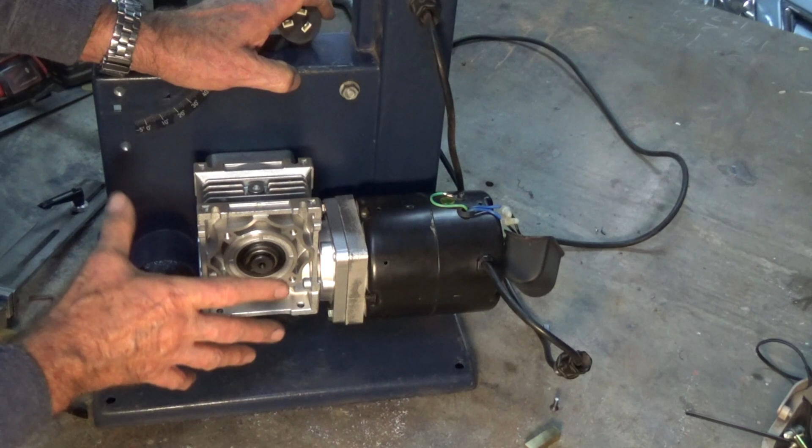Maybe you're looking at it saying, well, I want to cut steel that's 1 inch thick. Well, this is not for you. This isn't going to do it. So unfortunately, maybe you need something bigger and beefier to do that sort of work. But for me, this is good.

Check in next time. We're going to see this maybe finish. Maybe we've got 2 more episodes to go. I'm not sure. But I'm hoping that you're seeing that this has got some potential.